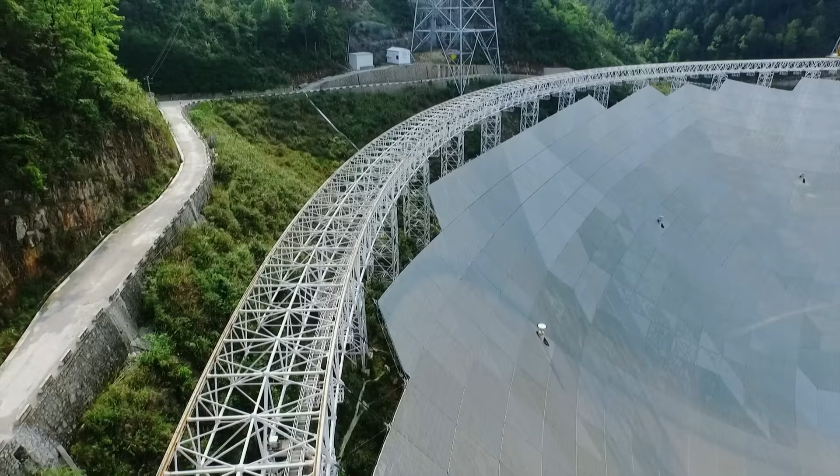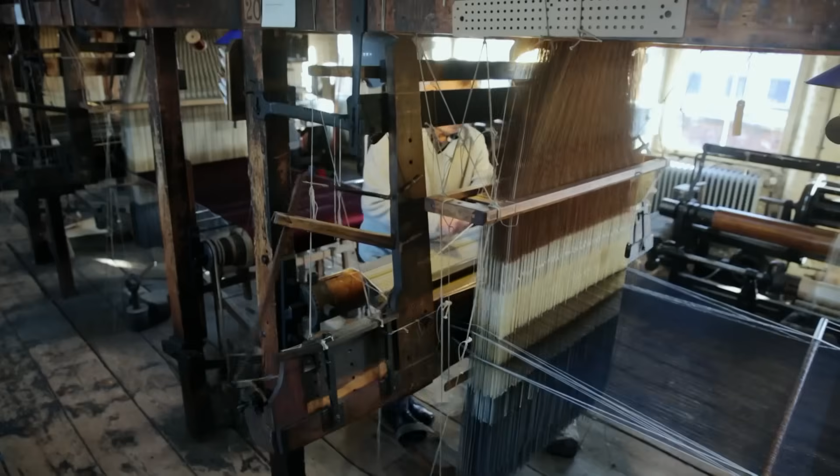A record-breaking radio telescope of astronomical proportions - the first telescope of its kind, the largest ever built. Space-age engineering that is out of this world. Those sensors can be located to within 1 centimetre in this 500-metre dish. And the innovative pioneers of the past - believe it or not, these are sound mirrors. Amazingly, all of these complex mechanisms are actually governed by a few simple ideas, from those who made the impossible possible.

Physicist Andrew Steele has travelled to remote rural China in search of a modern engineering wonder that could one day provide the solution to the greatest mysteries of outer space. This potential key to the cosmos lies hidden from view, seemingly in the middle of nowhere. Here, in the Guizhou province in southwest China, tucked into a natural basin, sits one of the world's newest and most advanced space exploration devices.

That is an incredible piece of engineering.

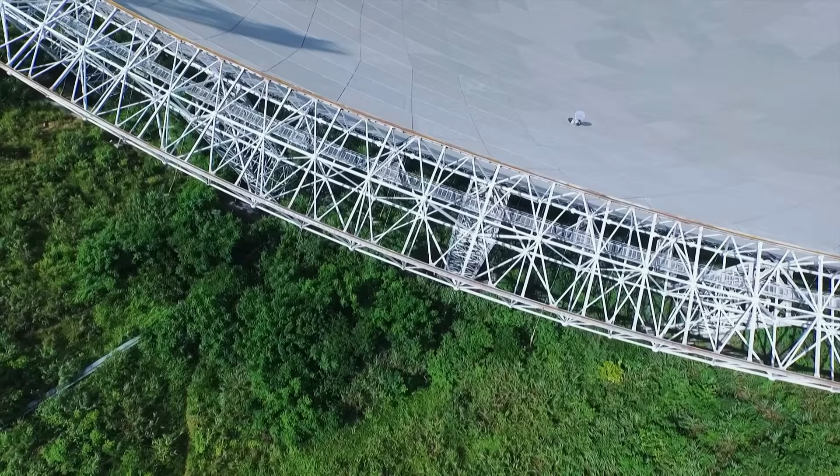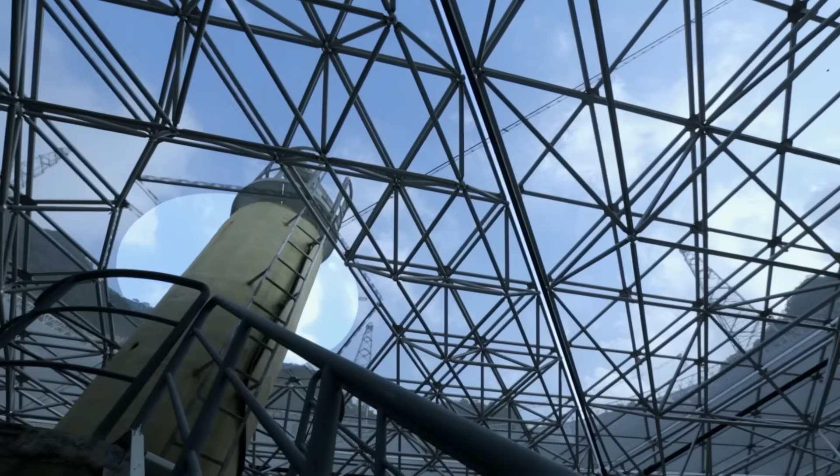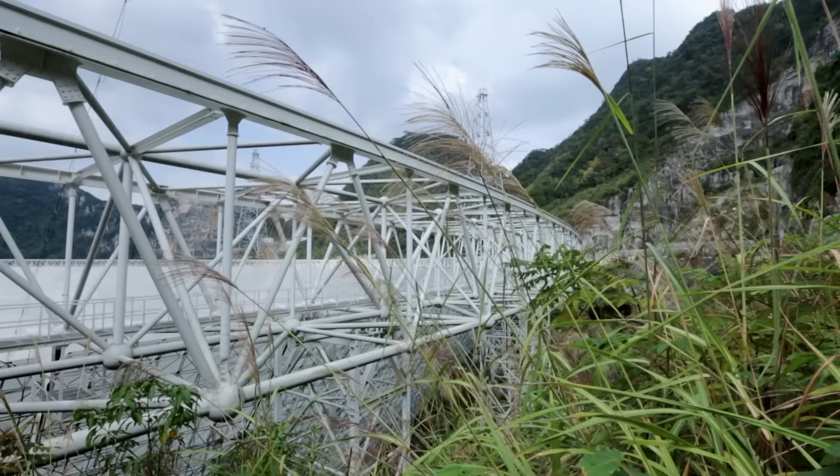The 500-metre aperture spherical radio telescope, or FAST for short, is the largest and most sensitive single-dish radio telescope in the world. It can pick up radio waves from billions of light years away and will help to unlock the secrets of our universe. A radio telescope senses the radio waves that objects in space emit, enabling astronomers to effectively see what's out there. Completed in September 2016, this $180 million feat of engineering will probe deeper than any radio telescope has done before.

He may be one of its creators, but for astronomer Peng Bo, the FAST telescope still has the power to astonish.

This is the most amazing telescope in the world. The collecting area is more than 30 football fields. If we fill the big dish with wine, everybody in the world could have 4 bottles of wine.

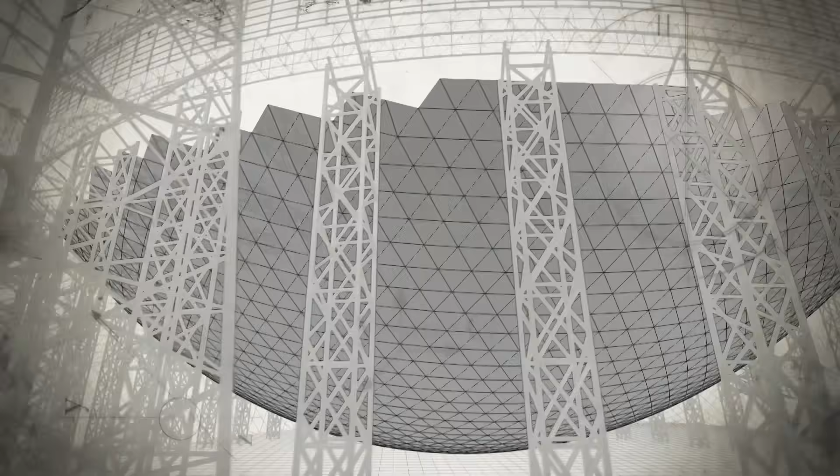This gigantic 500-metre diameter antenna is constructed of 10,000 steel cables weighing 1,600 tons. On top of the steel spider's web sit 4,450 triangular panels. At the centre, suspended from 6 100-metre high towers, hangs the 30-ton receiver cabin. And it can collect data from billions of light years away.

But building a project on this scale is no easy task. When we proposed such a big telescope, nobody believed this big dish could be built.

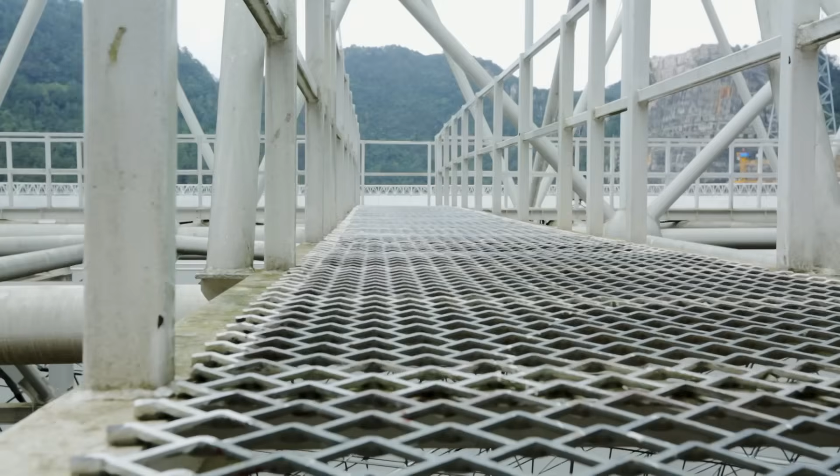The first problem engineers had when constructing this thing is its sheer size. FAST is vast. To put that into context, the previous world's largest radio telescope was 300 metres across - this thing is 500 metres. That's over twice the area for collecting those faint radio waves coming down from the sky. So how can FAST engineers build a receiving dish of such epic proportions?

It's a challenge that would be impossible without some of history's greatest innovators.

Since man emerged from his caves and began building his own homes, most designs have had one thing in common.

Fantastic. Oh, I say, it's simply marvellous. 4 walls and a roof.

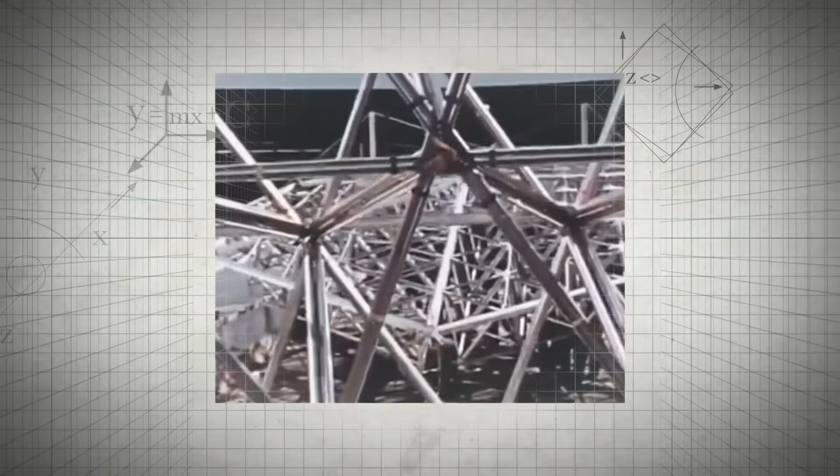But in the 1940s, a revolutionary mathematician, architect and inventor, Richard Buckminster Fuller, had another idea. During the USA's post-World War II housing shortage, Fuller was tasked with creating a cost-effective and easy way to build homes quickly. What he came up with was a geodesic dome house.

In southwest England, science communicator Kate Mulcahy is getting a bird's-eye view of how Fuller's geodesic concept can be scaled up to an extraordinary level.

Behind me is an icon in conservation and a feat of modern engineering - these are the biomes, part of the Eden Project. Dangling up here, getting a really good view of them, you can see that while they are dome-shaped enclosures, they're actually covered in a really intricate pattern of hexagons and pentagons with sharp angles and corners. This geometric feat is not just about looking good - it actually has a really important purpose.

Constructed in a disused clay pit in the heart of Cornwall, its designers wanted to house a variety of plants from differing climates, including the tropics. Measuring 55 metres high, 100 metres wide and 200 metres long, surrounding an area the size of 34 football pitches, the rainforest biome is actually large enough to house the Tower of London.

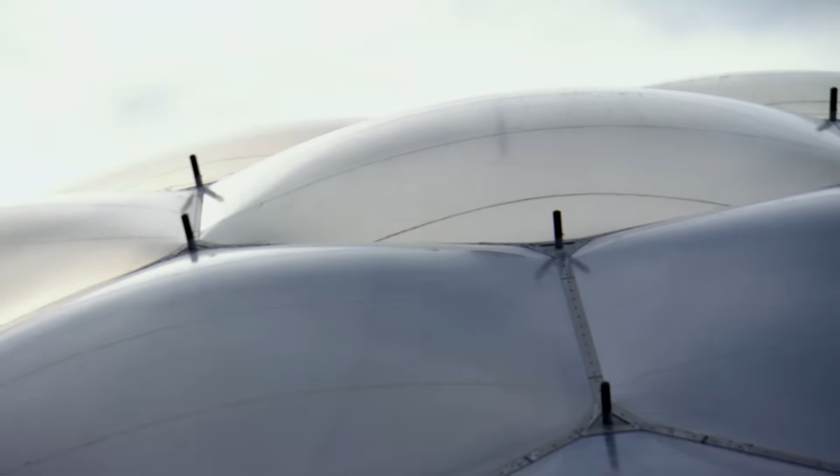And this is how Fuller's clever concept makes it all possible. A geodesic dome is a spherical structure made of triangular elements that form a network of circles to create the surface of the sphere. Like the biome here, there's a hexagon formed of triangles, and that creates the pattern that makes the surface of the sphere. Fuller's argument for using a half sphere or dome to create a house was part of his more for less philosophy.

When a sphere's diameter is doubled, its surface area quadruples, but its volume increases by 8 times. That means a sphere creates the largest volume for the least surface area. And less surface area means less material, and so cheaper houses.

But the real strength of Fuller's design was that it was made with a series of triangles. The triangle, with its fixed angles, is actually the strongest two-dimensional shape.

Now I want to show you exactly how this works by building one of these using only these. As I'm joining the triangles together, they begin to form the shell of my structure, and the rigidity of each triangle begins to form a tremendous strength.

It's only when this final piece gets added that the strength comes together. Now I have a self-supporting structure, and whatever stress I put on it gets distributed evenly across the whole structure.

The beauty of Fuller's geodesic dome design was that the bigger it got, the stronger it became. The only man-made structure to do such a thing.

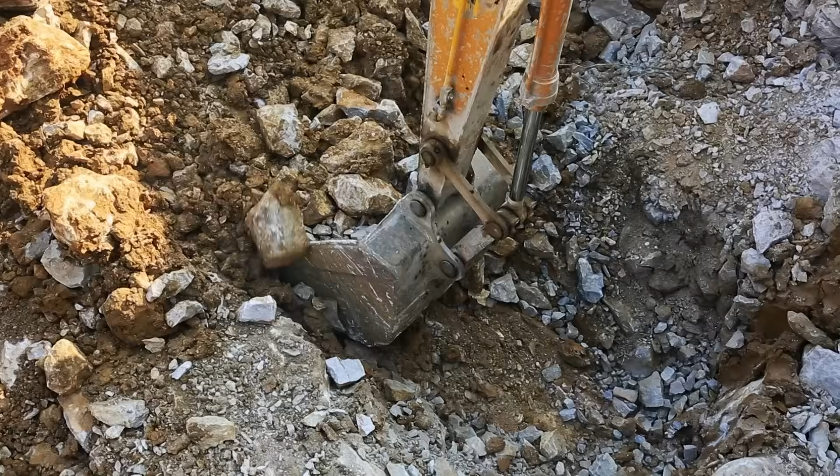At the FAST Radio Telescope in China, engineers take Fuller's geodesic method of construction, supersize it, and flip it on its head to create the world's largest uninterrupted dish.

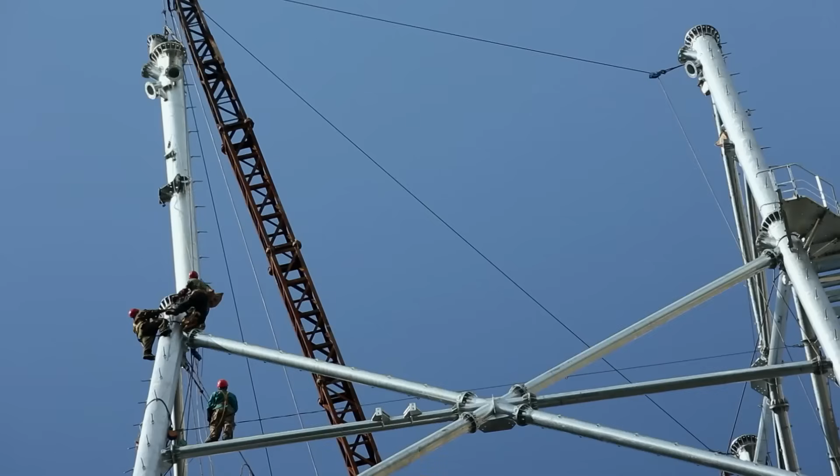Every time I saw each component built up, I feel very, very excited.

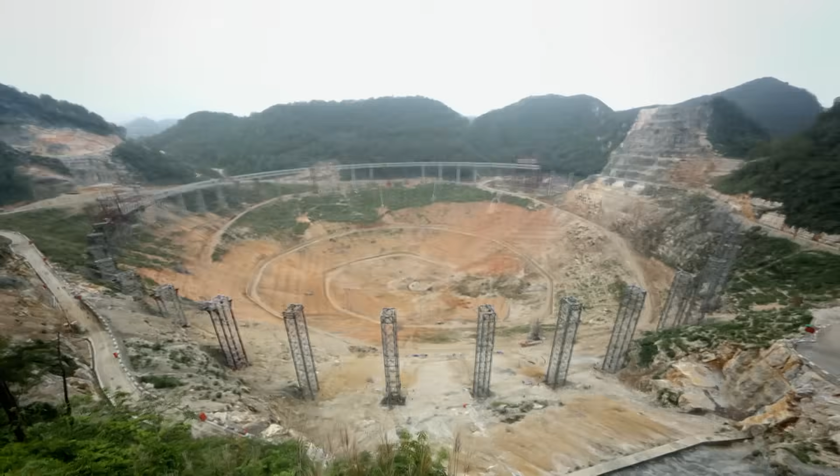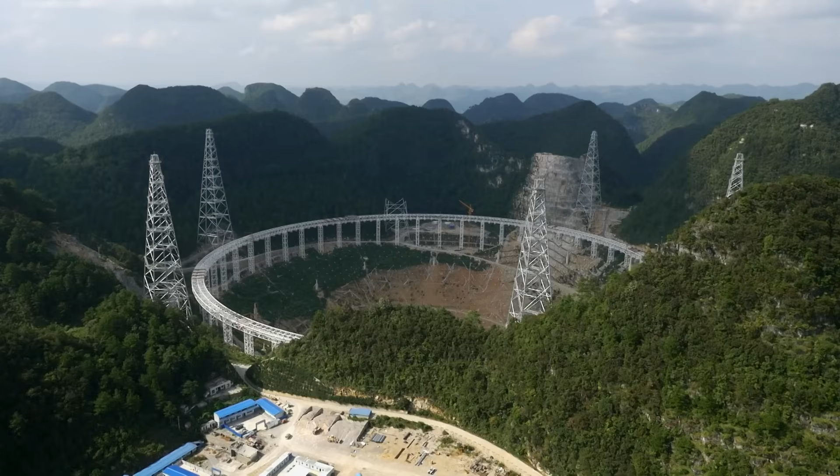A 1 mile long steel girder ring first forms the outer perimeter of the dish. Surrounding that, 6 100-meter high towers rise up to support and suspend a 30-ton feed cabin built to house the essential cutting-edge receiver technology that will capture the all-important radio waves.

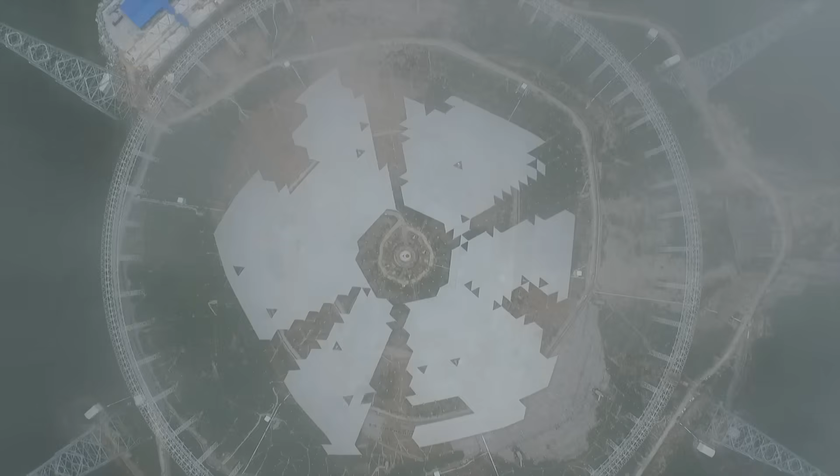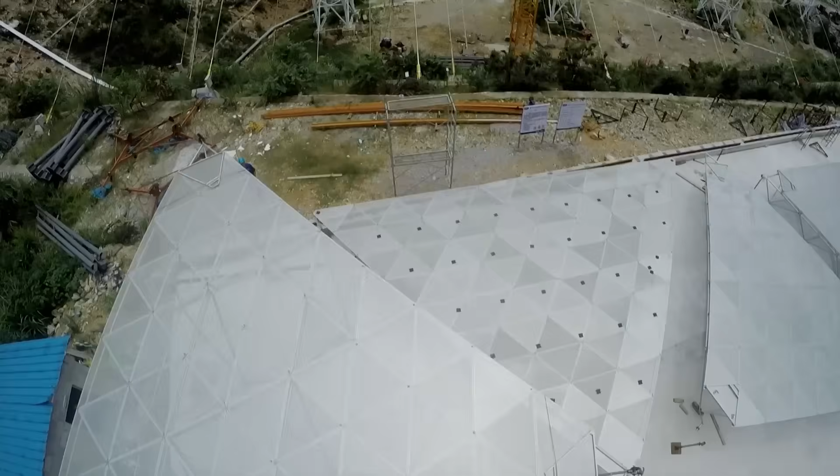When we propose such a design for a giant dish, nobody believed it can be done. So in order to build such a giant spherical reflector, a geodesic triangular design is the best choice.

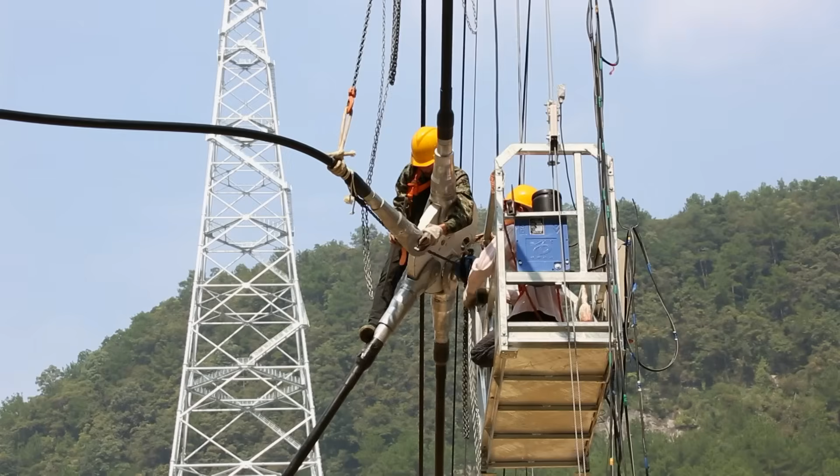The dish has been divided into about 4,450 panels. The panels are supported by an elaborate 10,000-strong steel cable mesh structure weighing 1,600 tons.

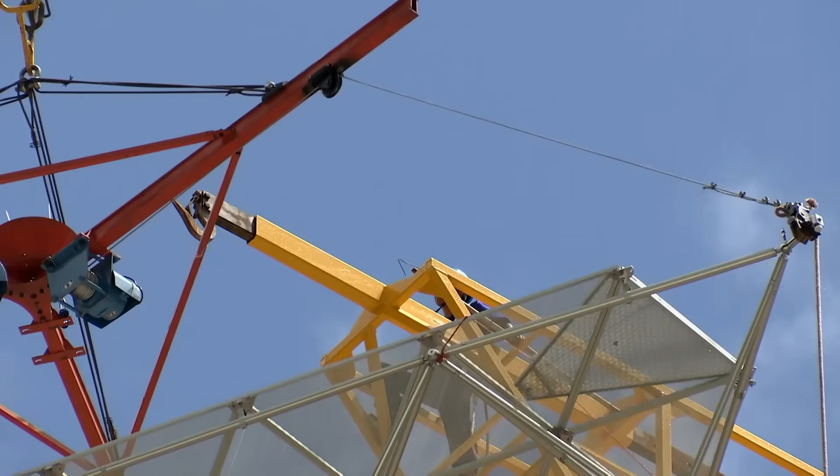And after just 5 years of construction, the last 11-meter aluminium triangle panel is lowered into place on the 3rd of July 2016.

This is just an absolutely awesome structure. It's epic in scale. Those aluminium panels are perforated to keep them firstly lightweight, secondly to allow the rain through, and finally to allow the light through.

That means the plants can grow on the surface underneath and their roots can get down into the soil and provide a bit of support for this truly enormous structure.

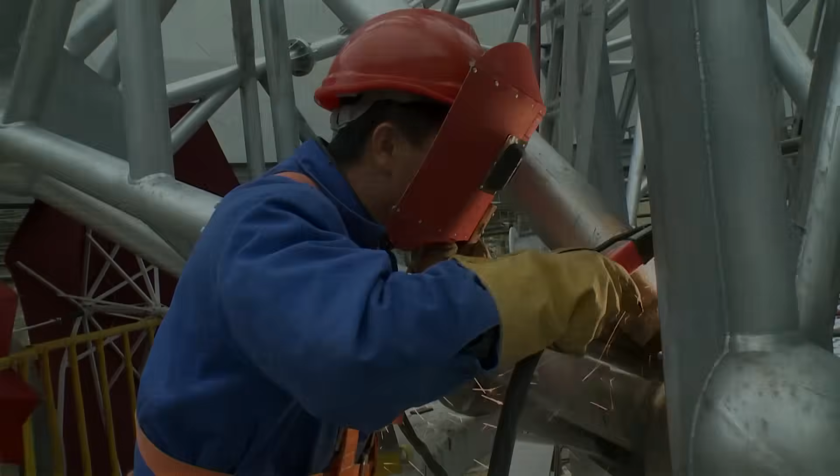But building the giant dish is just the beginning. To create the most precise telescope ever built, the team at FAST will need to draw on the inspirational pioneers of the past. Suddenly, the biggest threat came from the sky.

Hidden in the mountains of the Guizhou province of southwest China, an extraordinary structure has just appeared. The 500-meter aperture spherical radio telescope, or FAST for short, is the world's largest radio telescope.

And physicist Andrew Steele is getting a privileged view. FAST is massive, and that's ideal for collecting those weak radio signals from billions of light years across the universe.

But it also presents engineers with a big problem. FAST is so huge it has to be fixed to the ground.

Smaller radio telescopes have a receiver fixed at the centre of the dish to collect reflected radio waves. The dish is rotated to point at the exact place in the sky under observation.

But at FAST, that traditional approach is just not possible. As you can see from this rather nifty little scale model, you can't just tilt the whole landscape to point FAST at a particular galaxy you might be interested in studying.

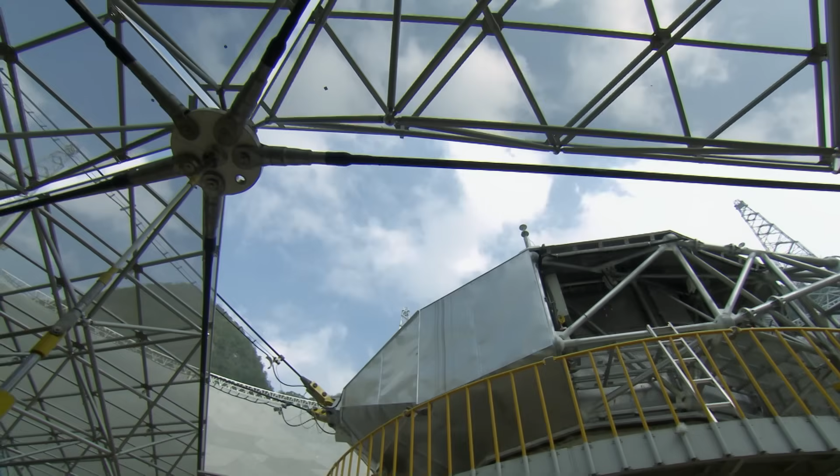So, how do you make a telescope the size of FAST point at different places in the sky? For the answer to that seemingly impossible challenge, the team would need to draw on some of history's great innovators.

Since classical times, a shape known as a paraboloid has been treasured for its reflecting qualities.

In the 3rd century BC, legend has it that Archimedes used parabolic mirrors to concentrate the sun's rays and set fire to invading Roman ships.

We'll call it a ray gun.

17th century astronomers searched the skies in new clarity by adding such mirrors to their optical telescopes.

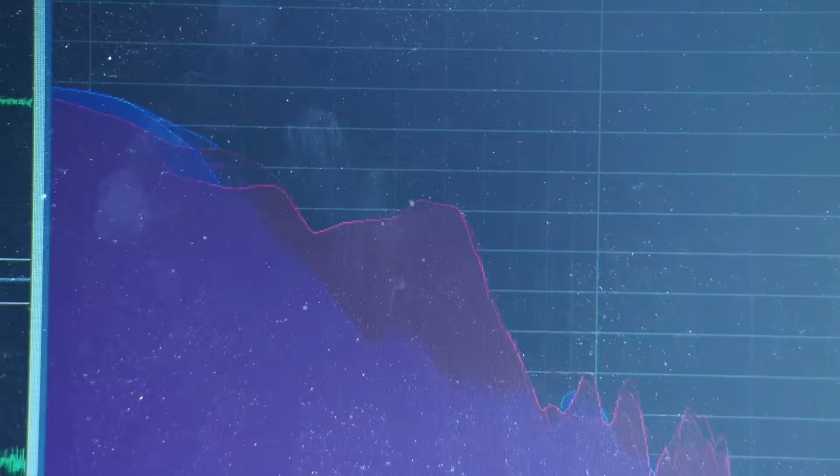Now, at the moment, nothing much is happening. The curves are the same. I can't really see any difference. So hopefully, as a plane approaches, the blue curve is going to show us the amplified noise of that plane, and we should see that on the blue curve first before we can hear it out here and see it on the red curve.

So I can start to hear something. You can definitely hear a plane propeller. As the plane approached, listeners on the ground using the sound mirrors would have been able to hear their engines in time to scramble air defences. So I can definitely see that the blue curve is above the red one in this middle region here.

So there we go, we've actually managed to use this parabolic sound mirror to focus and amplify the sound waves from the incoming aircraft. And historically, we could use these sound mirrors to detect airplanes about 15 or 20 miles away.

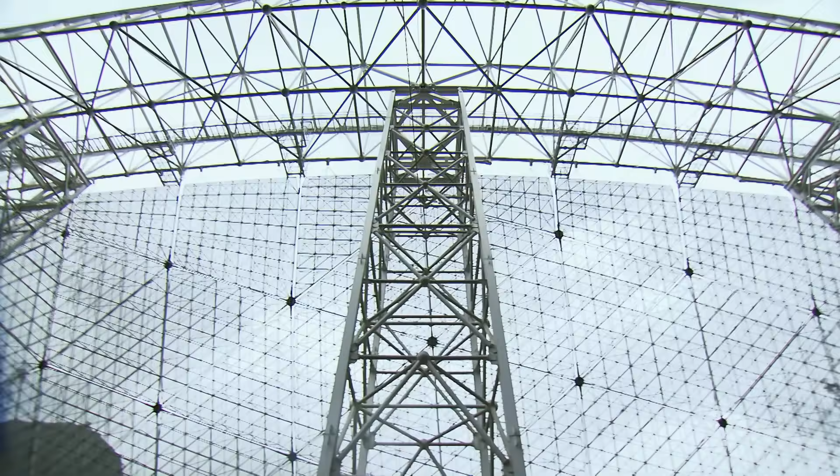At the FAST radio telescope in China, engineers have taken all that early inspiration and worked out a truly unique way to turn this seemingly static 500-meter diameter dish into a positional paraboloid.

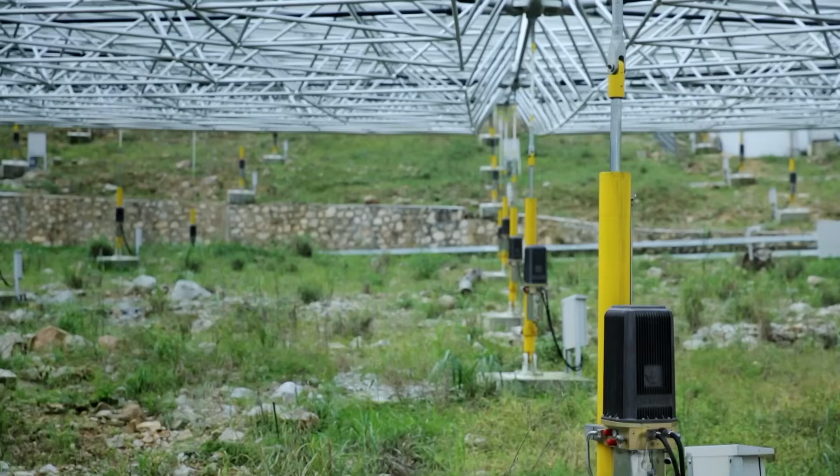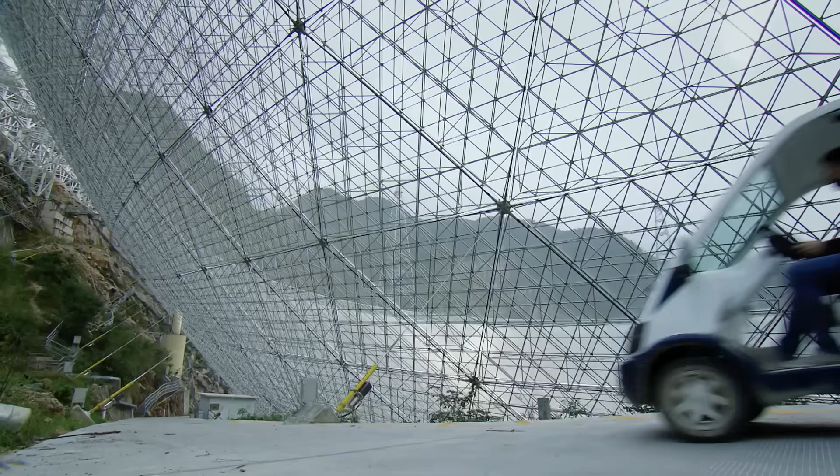This thing is enormous. Down here you can see just how ambitious this project really was. We're driving down into the bowels of the telescope. It's pretty unbelievable that once it was just a little farm in this karst depression, and now it's this incredible structure.

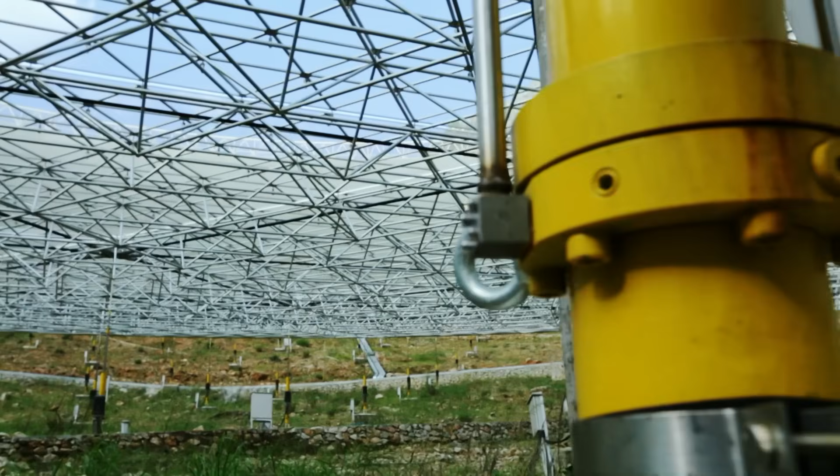From down here, you can really see what's unique about FAST. It uses these actuators to distort the dish. It's got what's called an active reflector, and these are used to tug this huge surface into the exact right shape to collect radio waves. They use 2,000 of these actuators to pull that dish down into that perfect parabolic shape to get the sharpest possible images of the sky.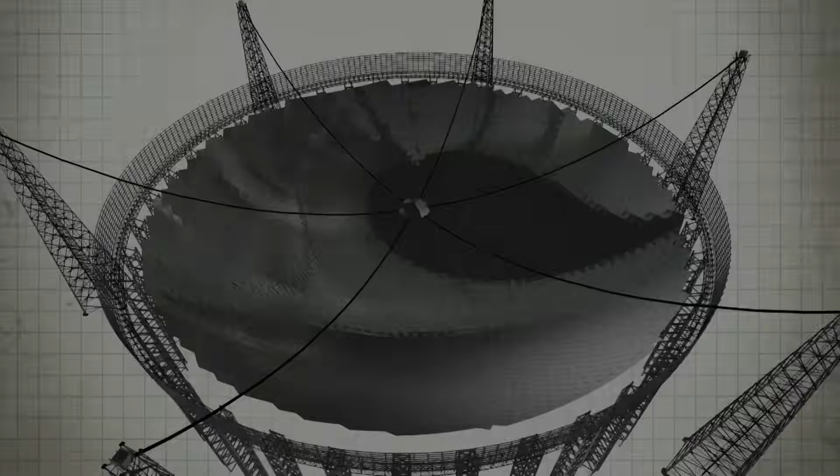The system allows astronomers to effectively point paraboloids at whatever area of the sky they want to focus on, making what on the surface looks like a giant static dish a dynamic, moving reflector.

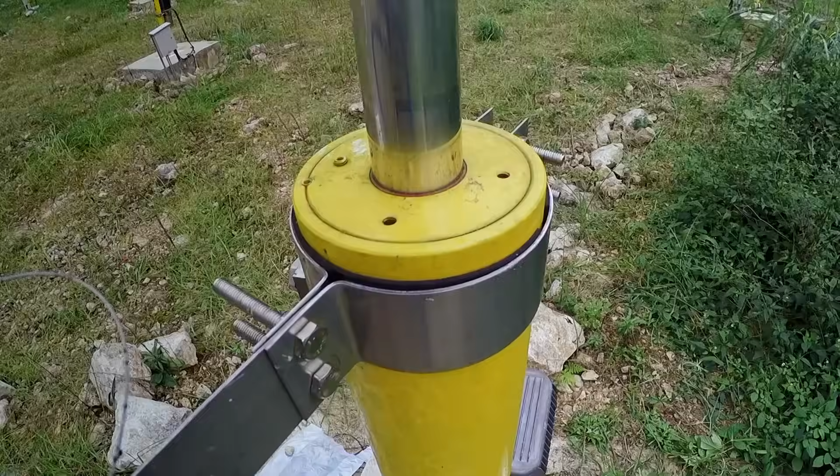That is the sound of this actuator starting up, and believe it or not, it actually is moving very, very slowly, about a millimetre every second. These actuators allow engineers to move 300 metres of the dish out of that 500-metre total, and that gives you a lot of flexibility. It allows you to look at different parts of the sky. So rather than just looking straight up, FAST can actually scan a region 40 degrees either side of that so-called zenith. This really is an incredibly innovative solution they've come up with here at FAST.

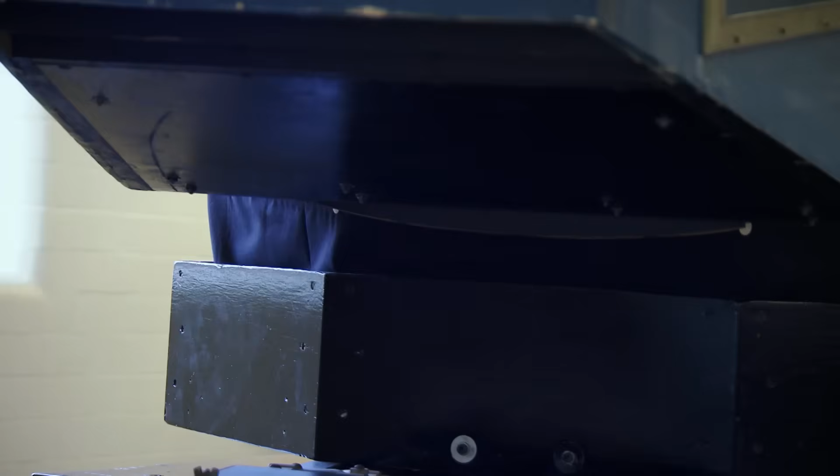But being able to distort the dish into a paraboloid is just one step towards a precise reading of the sky. To achieve this, engineers would once more look to the past.

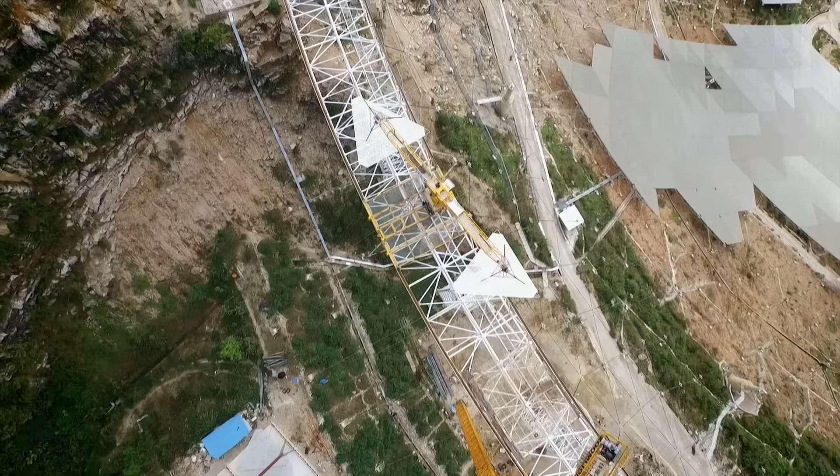Deep in the Guizhou province of southwest China, engineers have created the most powerful tool in space exploration.

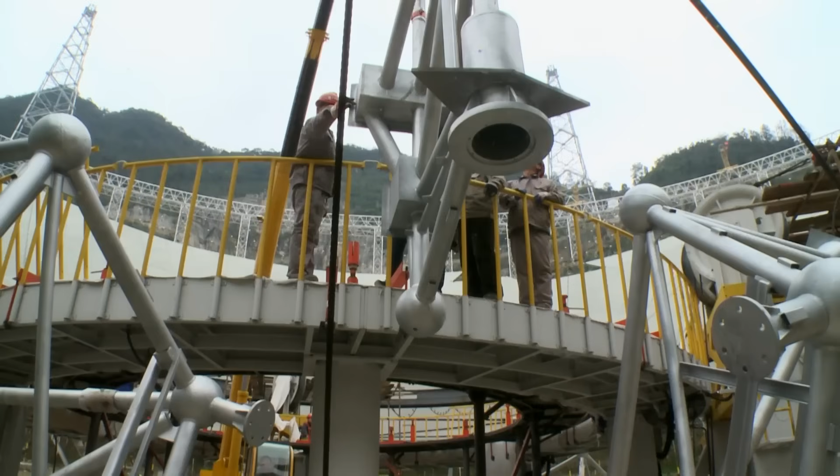Scientists wanted to create the world's largest telescope to carry on our global quest to understand what's out there in the universe, and that meant they needed to create a huge dish. Signals from the universe are extremely weak, and so you need a large collecting area to collect as many signals as possible from deep space. That's why you need to build a huge dish.

Despite its enormous size, engineers are able to distort the dish surface to create a paraboloid, the perfect shape to collect radio waves.

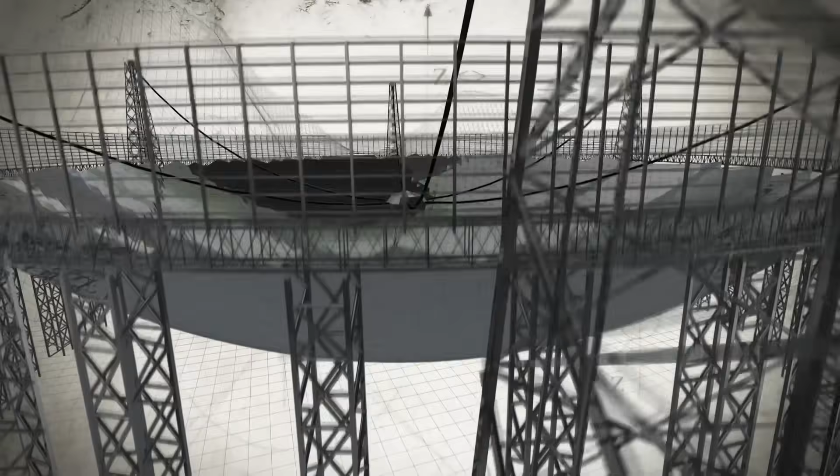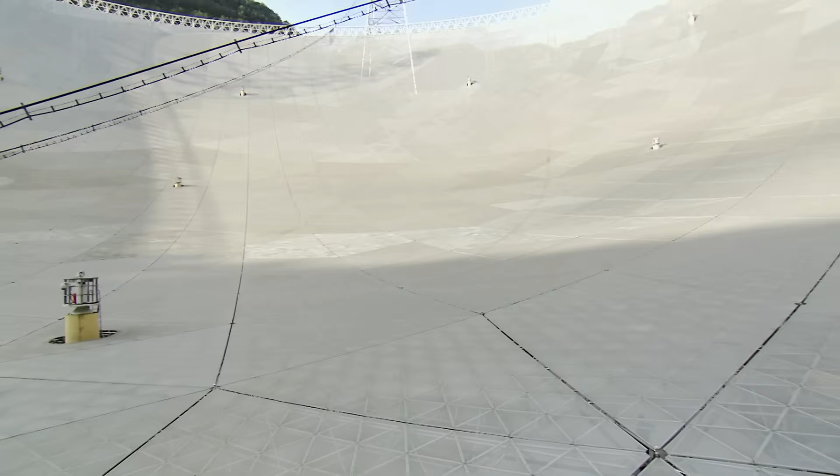This, however, creates another problem. The receiver needs to be at the focus of the paraboloid at all times. This is the sensor cabin, and it's right at the heart of FAST. Once the radio waves have been collected by this giant dish, they're all bounced into here. Now, in order to track a galaxy moving across the sky, you're going to have to keep moving this to keep it in exactly the right spot to look at the object you're interested in.

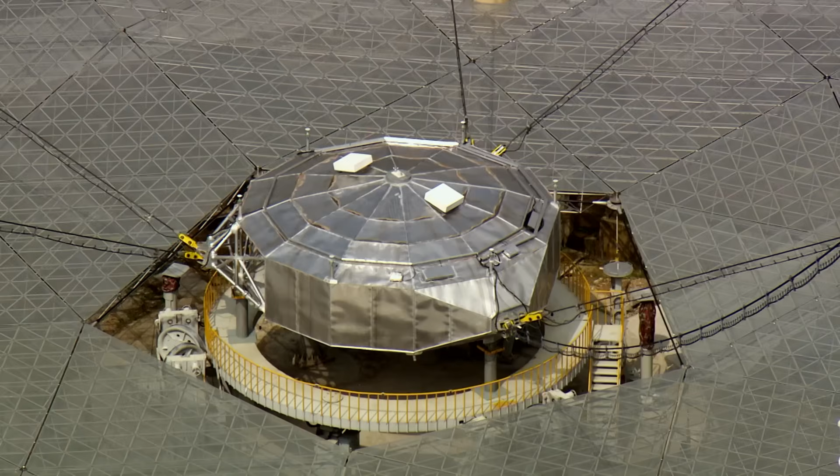But because this telescope is so huge, they can't just suspend the cabin on a fixed arm. This thing's actually dangling from 6 steel cables attached to support towers all around the perimeter of the dish. That means we have to know exactly where this thing is and control its movements very precisely to get the best images. To accomplish that exquisite level of minute alterations to something so large, engineers would need to produce more impossible engineering.

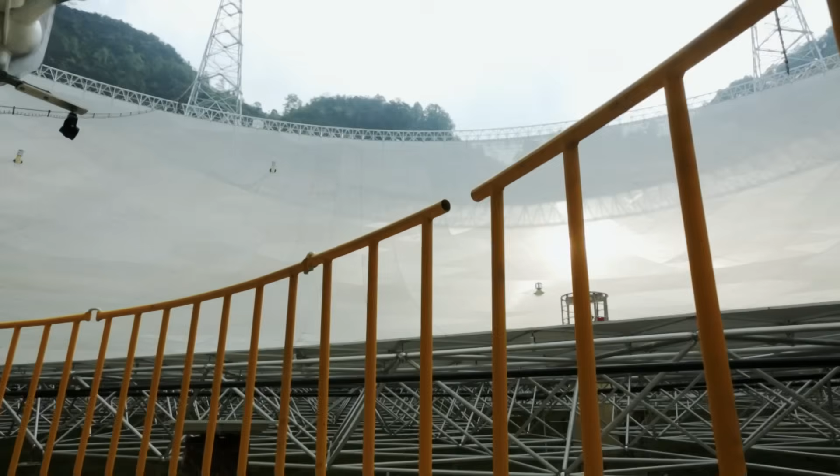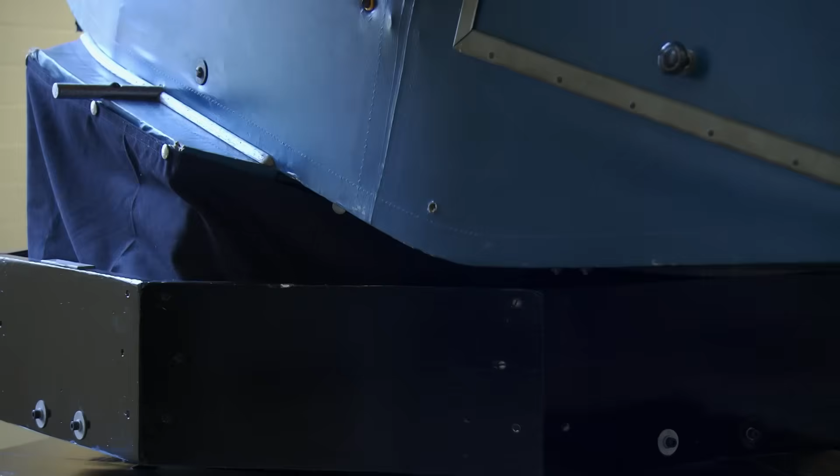Science communicator Kate Mulcahy is finding out that just as early aircraft were fairly primitive, so were the methods of training.

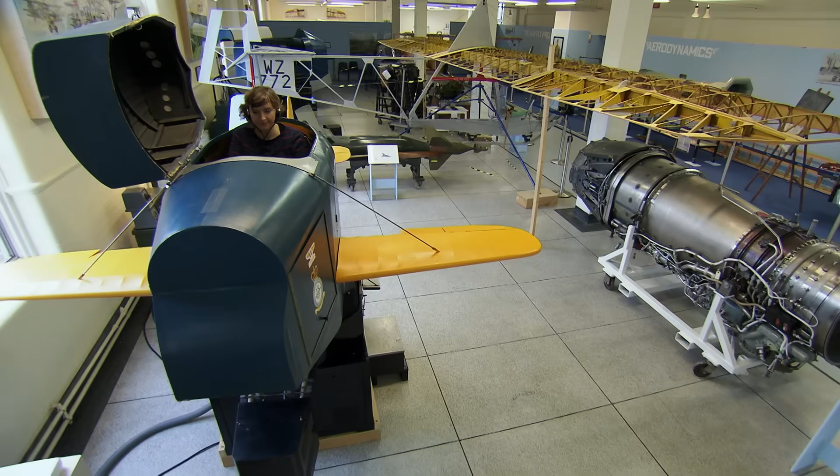Invented in the late 1920s by Edwin Link, the son of a New York-based piano and organ manufacturer, the Link trainer is considered to be the very first effective flight simulator.

This is awesome. Too much. I'm so bad at this. I don't feel any control.

What flight simulation really needed was more realism to recreate the true experience of the sensation of flight.

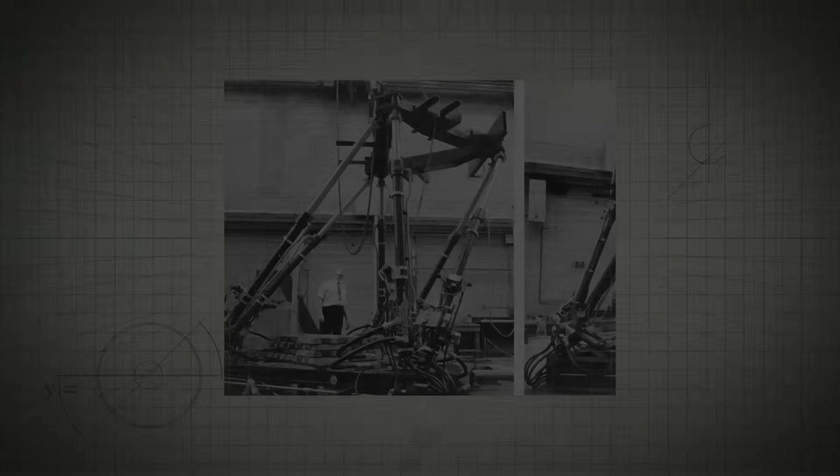In 1964, American engineer Klaus Cappel created such a machine. 6 hydraulic legs working in combination were able to emulate the movement of an aircraft incredibly realistically. His motion platform was the forerunner to modern flight simulators.

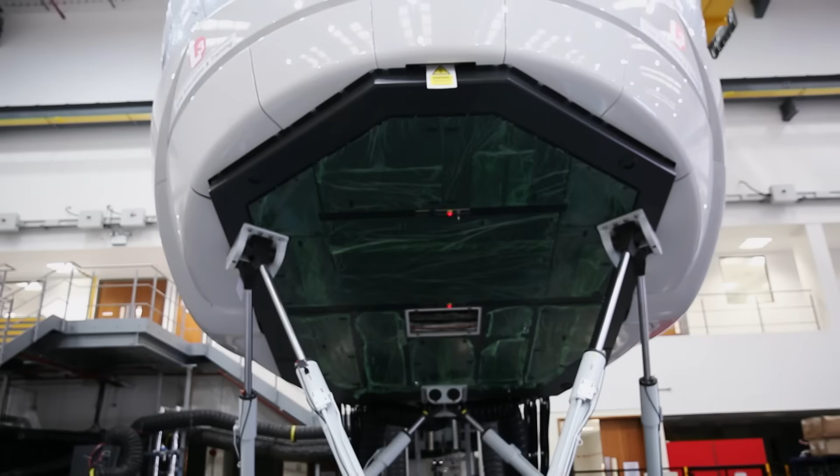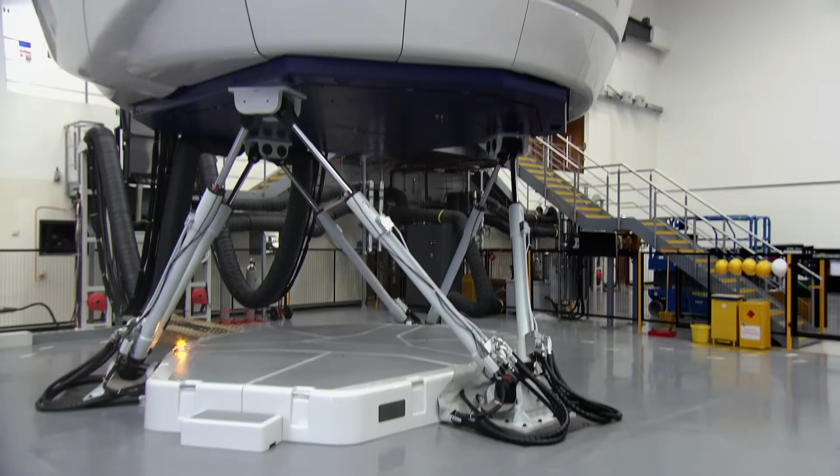And here they are. These are super high-tech versions of Cappel's motion platform technology. Each of these machines weighs over 14 tons and costs a whopping £12 million. These cutting-edge machines are some of the most advanced flight sims available today.

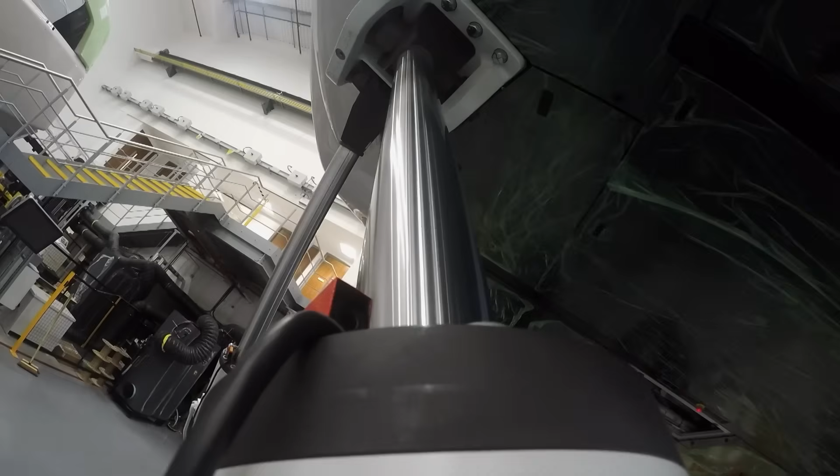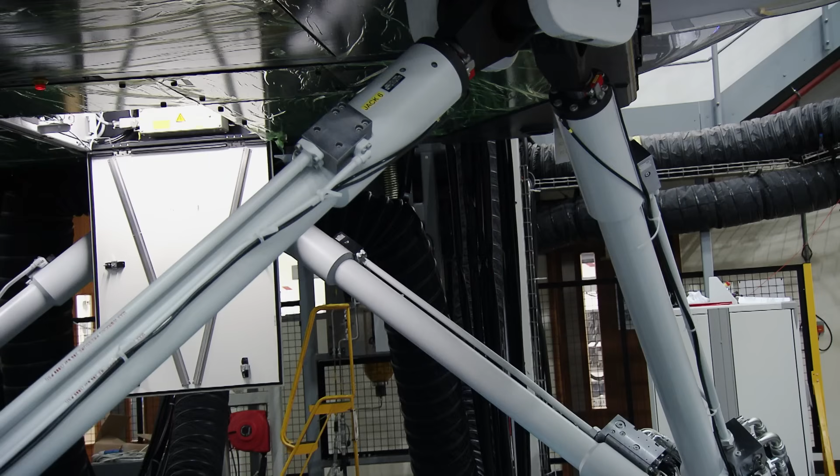You can see here there are 6 hydraulic jacks or actuators. They're positioned in pairs and move independently from each other, and that allows this motion platform such versatile movement.

Oh my God. I just took off an aeroplane. I can't see. What do you do?

The specific arrangement of the hydraulic jacks means that, just like a real plane, the cabin can move in what is known as 6 degrees of freedom.

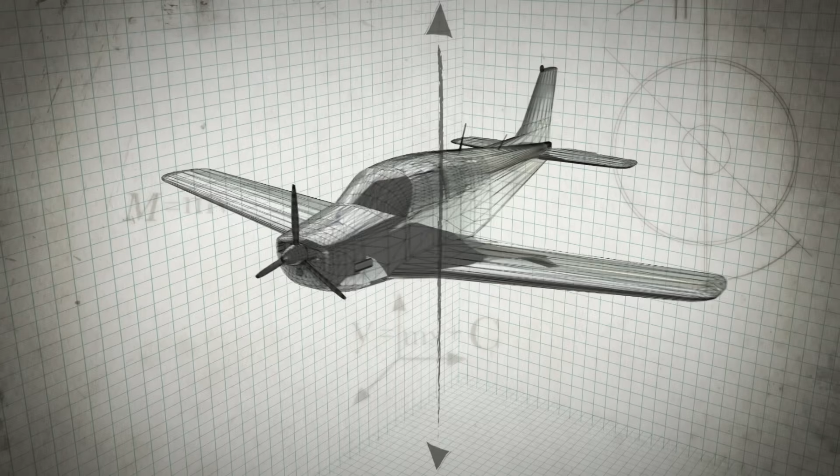3 linear movements: surge, or forward and backwards, heave, or up and down, and sway, or left and right. And 3 rotations: pitch, roll, and yaw.

It's amazing to think that thanks to these 6 hydraulic jacks sitting underneath this crazy simulator, countless lives have probably been saved. With its dynamic range of movement and its pinpoint accuracy, these motion platforms have opened up a world of possibility across a diverse range of applications.

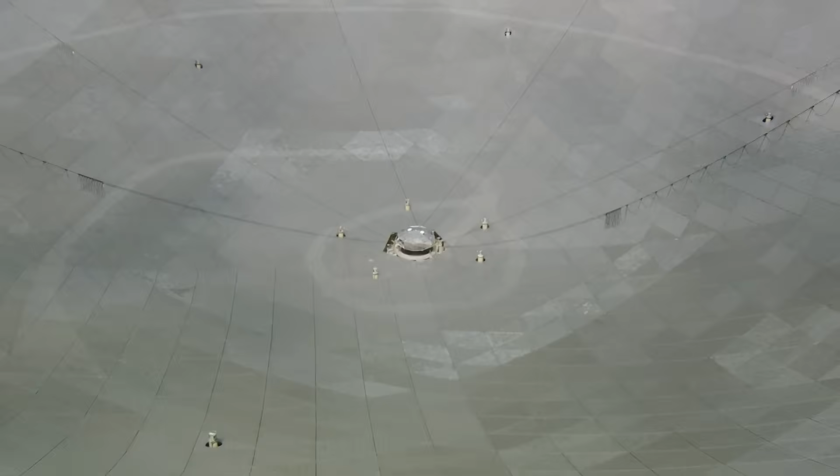Engineers at the newly created mega telescope in southwest China have taken inspiration from those early motion platforms and adapted them to help hunt the skies with millimeter precision. Engineers created this, a lightweight cabin that can be moved anywhere across the surface of the dish, a real innovation. It's 10 meters across, looks like a flying saucer, and it's known as the apple of the eye. Not only does it look like a UFO, it flies like one too.

When in operation, the 30-ton cabin, attached by cable to 6 100-meter towers surrounding the dish, is lifted 140 meters into the air. In here, we've got receivers sucking all that data and sending it back to the control room.

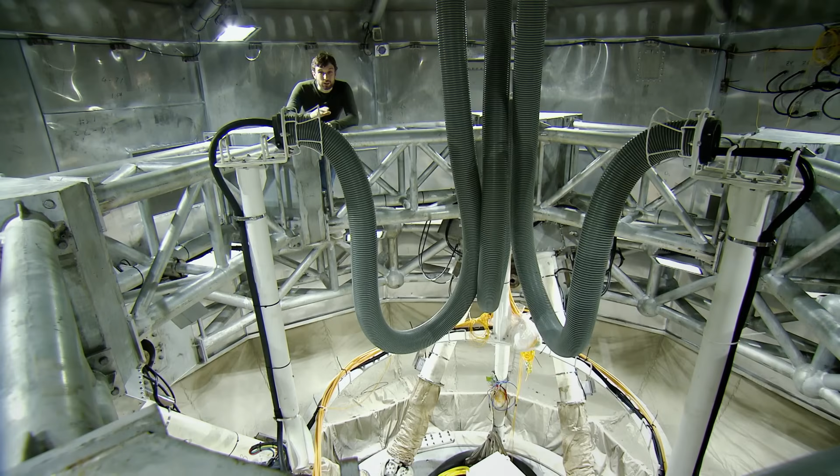But in order to keep those in exactly the right spot, we've got 2 different mechanisms at play. First, we've got those 6 towers out there, which tug this cabin into approximately the right position using the servo mechanisms and those 6 huge steel cables. Controlled by computers, each cable is individually retracted or released to position the cabin anywhere along a trajectory of 206 meters across the diameter of the reflector.

And drawing on Cappel's flight simulator, a motion platform is activated. For that final bit of precision, we've got those 6 hydraulic pistons controlling this platform, which allows the position to be corrected with incredible precision. Those sensors can be located to within 1 centimetre in this 500-metre dish. The servo mechanisms controlled by the 6 positioning towers combined with the accuracy the motion platform delivers has allowed the engineers at FAST to create a radio telescope of extraordinary sensitivity.

But a truly precise reading of the sky depends on the site itself. The key point to find a home for a radio telescope is the radio frequency environment, the radio quiet environment. So we need to find a remote site. Human beings make a lot of electronic noise, such as cell phone, microwave. All the electronic devices make magnetic wave. So all this device generates interference to our telescope.

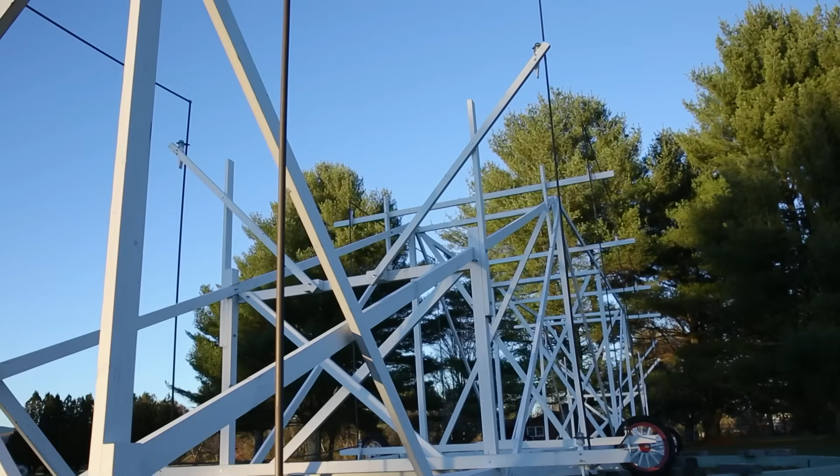In an attempt to trace it, Jansky built a large antenna. This is an exact replica of the antenna that Jansky built, and it is a work of engineering genius. It's 100 feet wide by 20 feet tall. Now, it doesn't look anything like the curved dishes of the other telescopes that we have on site. I think it looks a little bit more like the wing of an old biplane. But it is an antenna that can detect radio waves from space.

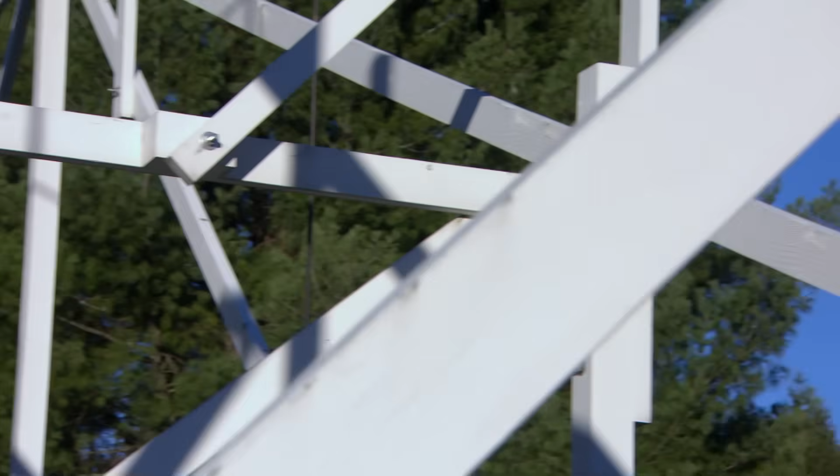Jansky's antenna connected to a radio receiver. The radio signals received by the antenna were amplified and recorded by pen on a moving paper chart. The antenna was mounted on a platform sitting on tires that allowed it to rotate, taking a full 360-degree scan of the sky once every 20 minutes.

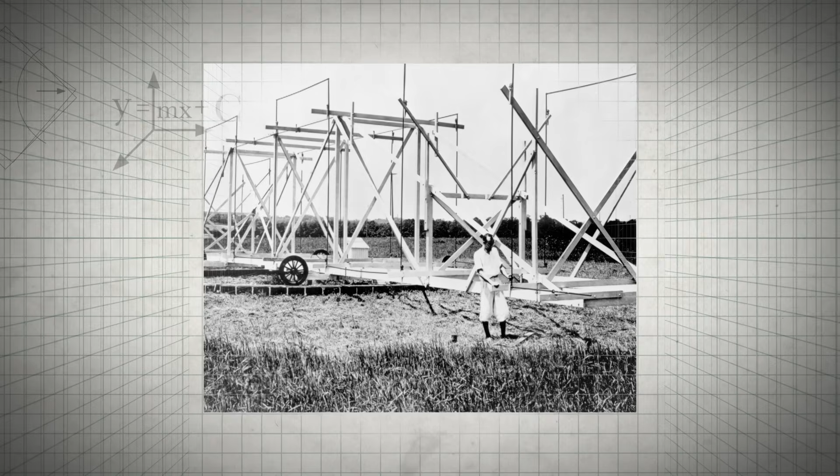Jansky built this in a field near where he lived in New Jersey, and as it rotated, the locals gave it the nickname Jansky's merry-go-round. His initial findings revealed a faint but persistent hiss that would rise and fall throughout the course of the day.

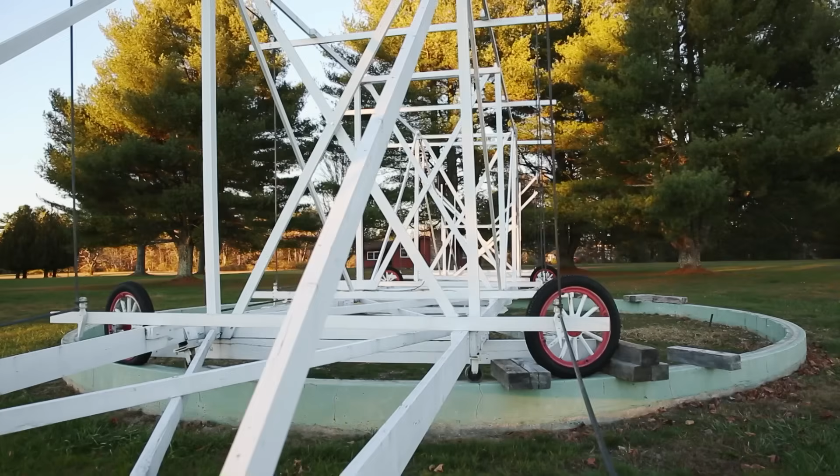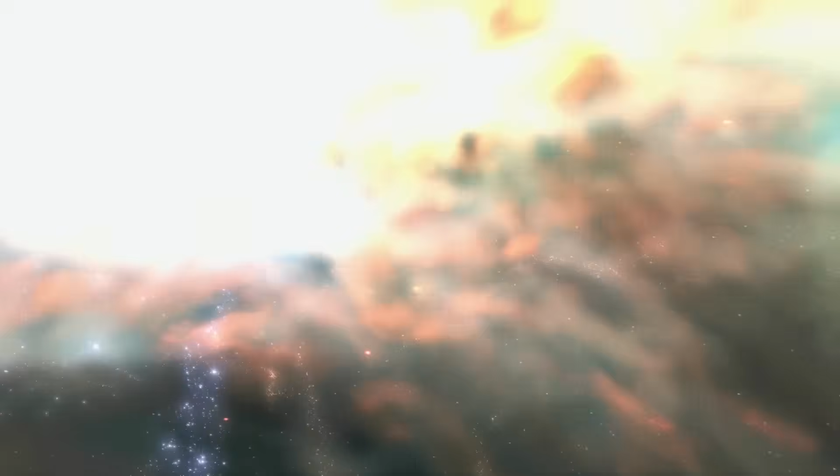As he continued to analyze the data he collected over many months, he realized something truly remarkable. The signal was strongest in the direction of the center of our galaxy. Jansky concluded that what he was actually picking up was radiation from the Milky Way galaxy itself. Jansky had discovered a new corridor to the cosmos.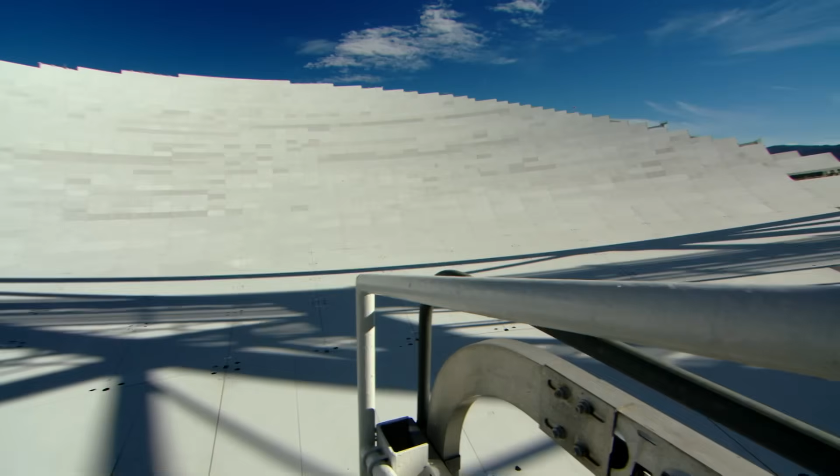As more precise radio telescopes were developed, groundbreaking discoveries were made, including the greatest of them all, the Big Bang. In 1964, astronomers Arno Penzias and Robert Wilson were able to record the origins of the universe.

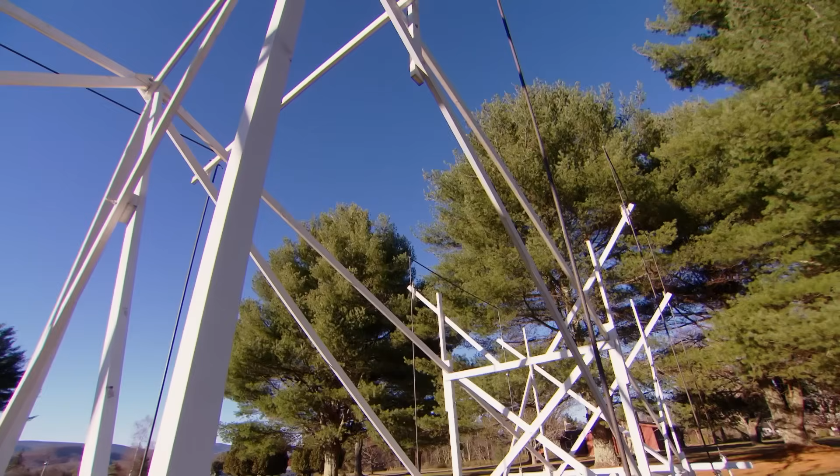Although it would take the work of later astronomers to really kickstart the field, Jansky's work offered definitive proof that radio waves could be detected coming from the cosmos. His directional movable antenna and wideband receiver form the basis of all modern radio telescopes. Jansky, with his plane wing contraption, is considered to be one of the fathers of modern radio astronomy.

Thanks to Jansky's discovery, the team at FAST have created a telescope of extraordinary power, which they hope will one day detect radio waves emitted by extraterrestrial life.

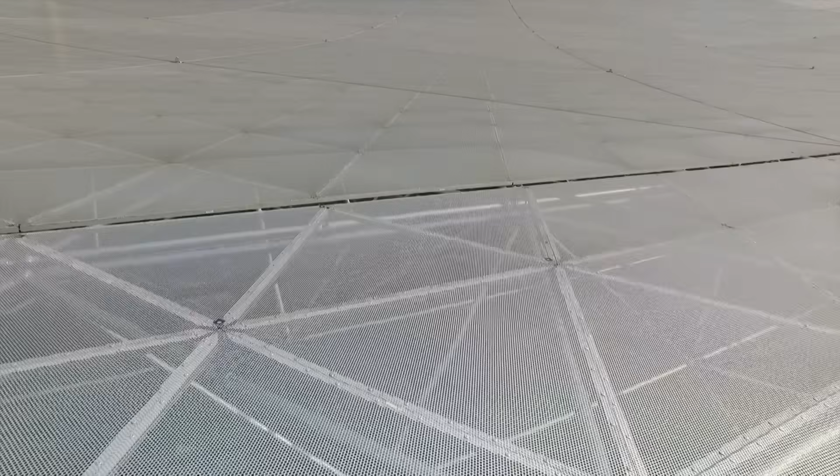Built into the Chinese landscape sits the largest and most powerful single-dish radio telescope on the planet. For FAST astronomer Peng Bo, it never fails to amaze. It's very exciting to see the giant dish from here. It was only a dream to build such a dish, but after a 20 year journey, we made it.

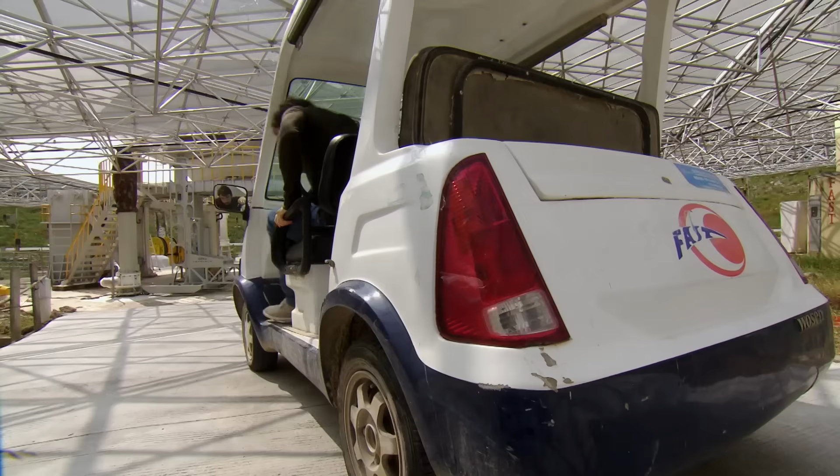As physicist Andrew Steele is discovering, FAST can generate a huge amount of data, and the challenge is to turn those individual radio waves into images. This is where the action happens. This horn is part of a beam receiver. It slurps up those radio waves and detects how strong they are. There's only one of these here now, but when this thing is finished, there are going to be 19. That puts it head and shoulders above any other radio telescope in the world.

But this poses a huge challenge for the engineers and scientists here at FAST. You've got to take that phenomenal amount of data and turn it into a picture. So how do astronomers and engineers transform radio waves into images? For that, they would need to turn to a truly game-changing innovation of the past to create more impossible engineering.

Science communicator Kate Mulcahy has come to a historic silk mill in northern England to uncover the unlikely beginnings of computer programming.

In the 18th century, garments made from intricately woven fabrics were the height of fashion all across Europe. Looms work by interweaving two sets of thread. The longitudinal threads are called the warp, and the threads running across are called the weft.

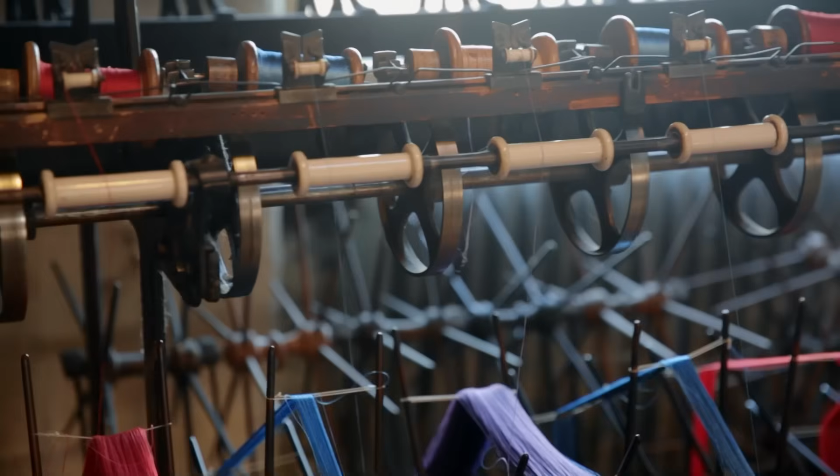Producing such detailed designs was no easy task, and producers really struggled to meet demands. In response to the manufacturer's plight, a French weaver called Joseph-Marie Jacquard invented a machine that would keep production on track and completely revolutionize the industry.

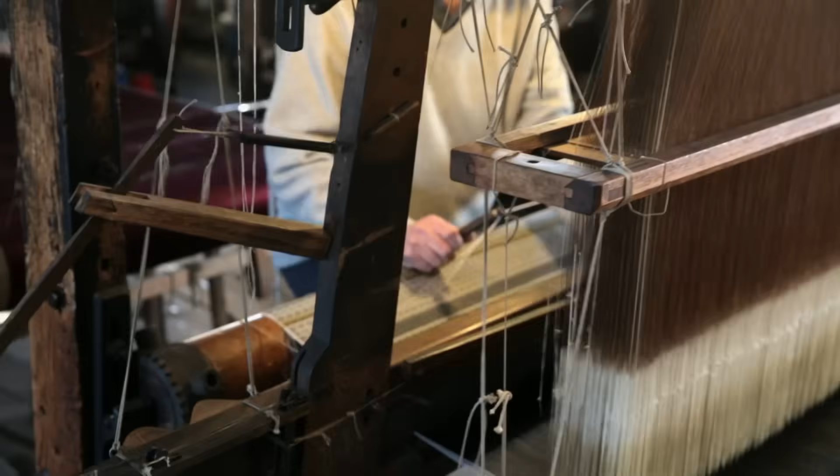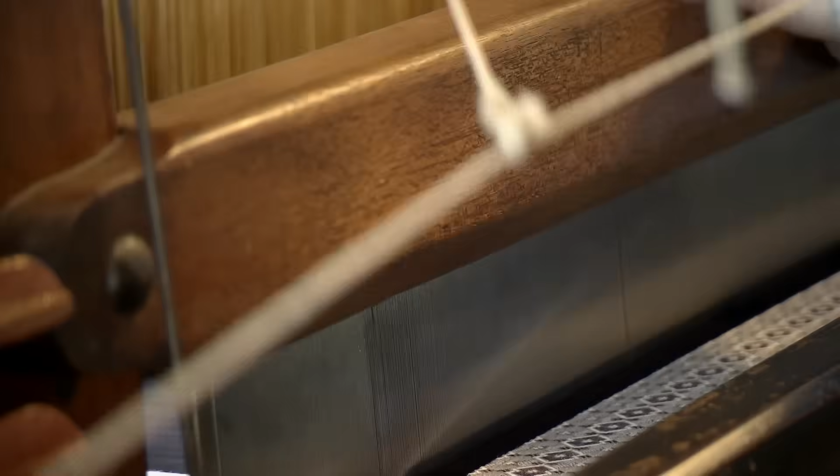And this is it. This is the Jacquard loom. Jacquard had achieved something that no other weaver had done before him. He combined the best in weaving technology to make this stunning machine. Amazingly, all of these complex mechanisms are actually governed by a few simple cards.

This is a card cutter. Skilled workers would use this to translate complex patterns into a language that the loom could understand. The first step would be to copy the pattern onto squared paper, a bit like this. Then for every piece of the pattern that's in a square, a hole would be punched in a corresponding position on my card.

Each punch card represents only one line of weave, which is pretty amazing. The next thing we need to do is to take my card, put it into the loom, and that's when the magic really happens.

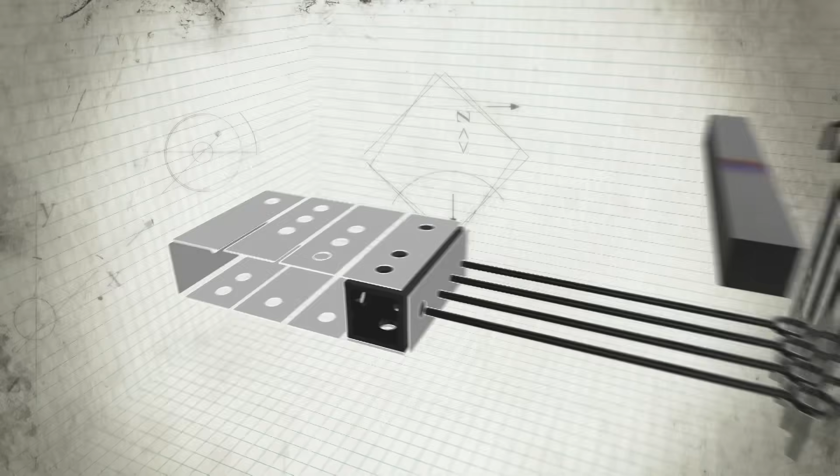As the cards enter the head of the machine, they're pressed against rods protruding horizontally from the loom. Each rod controls an individual warp thread. Where there is a hole in the card, the corresponding thread is lifted. In this way, the cards dictated the pattern being woven.

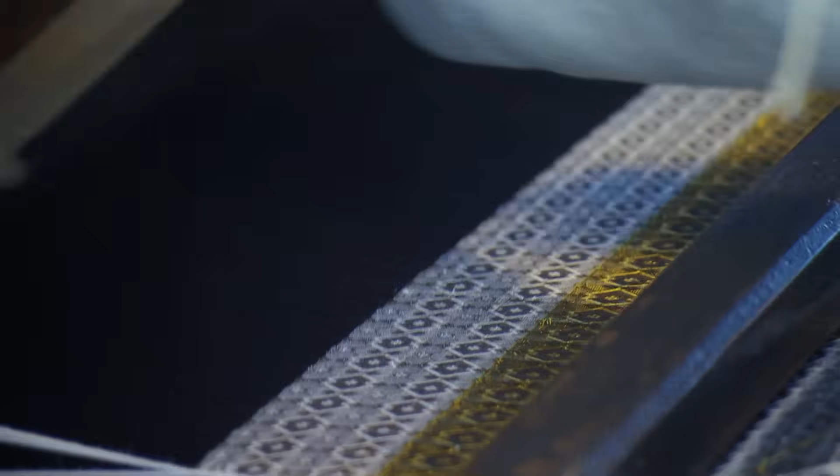One pattern could take thousands of cards. Brilliantly, if you needed to change or amend your pattern, you simply need to load more cards. Whilst a hand loom operator could produce around 2 inches of fabric a day, the amazing Jacquard loom could produce 30 times as much, and it only required one person to operate it.

The hole or no-hole card system is essentially an early version of binary code, still the basis of all computer language, and this method of programming a machine later caught the attention of computer pioneers.

Inspired by the marvellous weaving machines from France, American inventor Herman Hollerith developed similar cards as a method of storing the 1890 US Census information. Holes denoting specific meanings, for example age, gender or marital status, could be read by Hollerith's tabulating machines, allowing census data to be collated 10 times faster than previously.

In the 1960s, computer programmers were using punch cards to create, edit and store computer programs. Incredibly, this is actually a computer program. It's a series of instructions encoded in holes telling the computer exactly what to do. Now, just like the punch cards we looked at earlier, where each card represented a single line of the pattern, here, each card represents one single instruction for the computer. So a computer program could end up being made up of thousands of cards.

In the 1980s, punch cards were largely phased out in favour of magnetic tape and discs that were able to store more data. Punch cards were the first big step towards building a computer that could be programmed to do just about anything you can imagine. They gave programmers the license to dream big. Suddenly, the possibilities were endless, from connecting the planet to better understanding the universe.

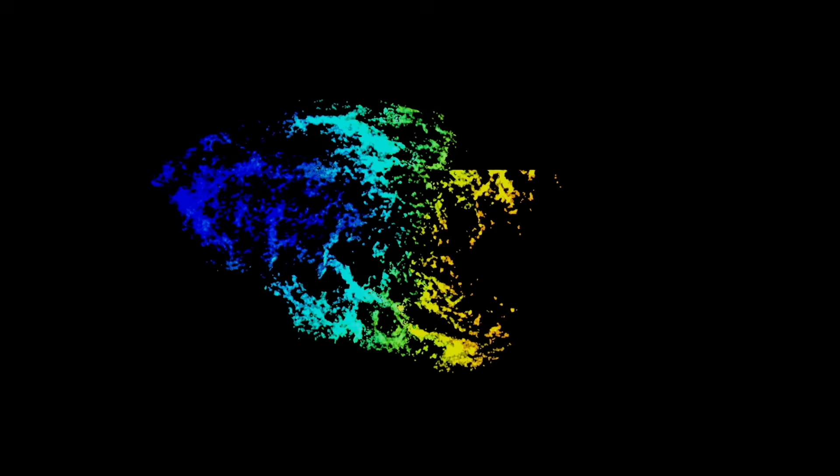Radio waves travel through space like light, but are invisible to the human eye. To turn these signals into images, astronomers use computer software to label each individual wave received with a color code, depending on the signal strength. The resulting buildup of colors forms a pattern, which in turn becomes an image identifiable to the human eye.

To create those radio images, astronomers at FAST will need to process a lot of data. We expect FAST can generate 40 terabytes per night, so we need a huge amount of storage system. Here we have roughly 1.6 petabyte storage, and also we have a high performance computing system to process the data.

We can start to try to use the telescope to explore a completely new universe that have never been explored before. We are expecting to see lots of new things. This is very exciting for astronomers, also I think for human beings, because they'll know some new knowledge about the unknown, about the universe.

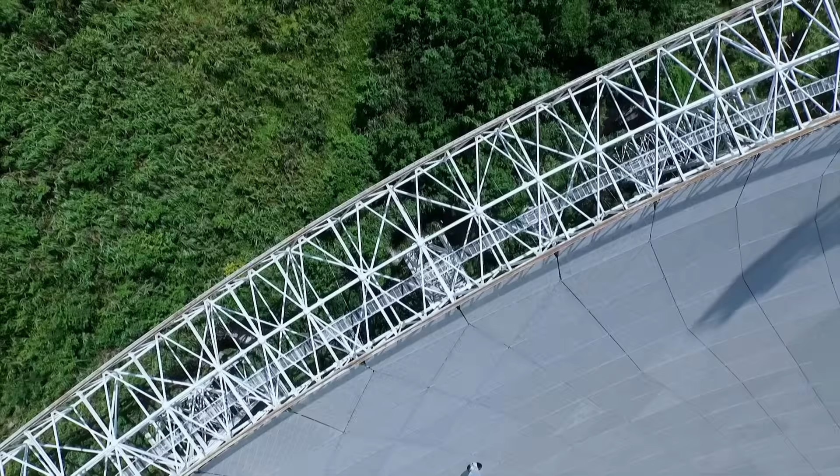Officially completed in September 2016, FAST is now ready to begin searching the skies further and deeper than ever before. FAST is going to revolutionise radio astronomy and transform the way that we look at the universe. We just didn't know it was possible to build a dish this big, so we didn't know that you could make a machine this accurate and this powerful.

For astronomer Peng Bo, it's the culmination of a lifelong dream. I'm very proud to be a member of this team to build a giant radio telescope. So I'm very proud of the achievement you see today here.

By drawing inspiration from the great pioneers of the past, adapting, supersizing, and developing innovations of their own, the designers, engineers, and workers at the FAST telescope have succeeded in making the impossible possible.

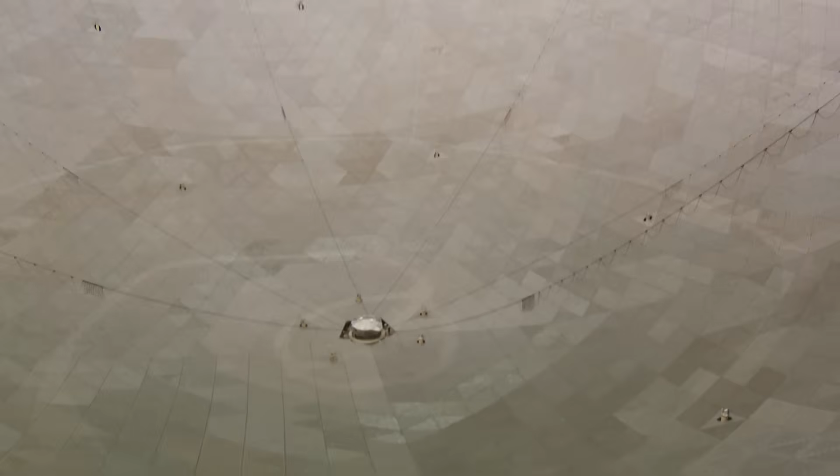FAST is going to allow us to scan more of the sky more quickly than was ever possible before. It's going to give us fresh insight into why the universe looks the way it looks and where it came from. And even more than that, this huge geodesic bowl, buried deep in the rugged South Chinese countryside, is just an engineering marvel.